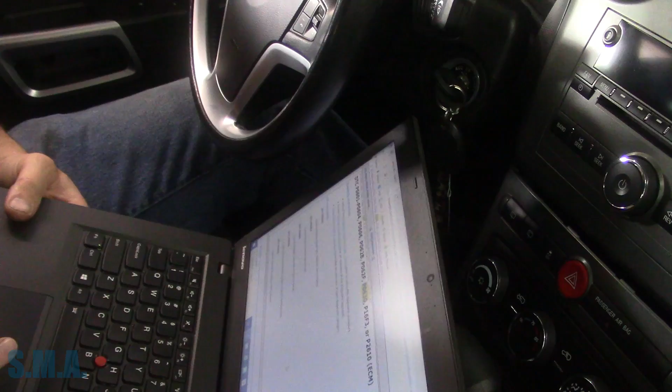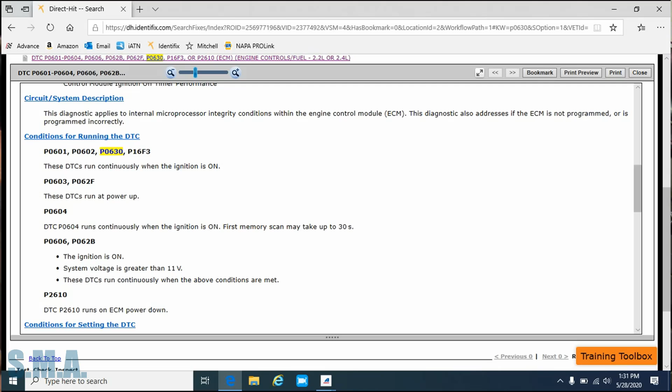Alright, so here we are, P0630, let's scroll down. VIN not programmed or mismatched. Circuit description applies to internal microprocessor integrity conditions within the engine control module. Diagnostics also addresses if the ECM is not programmed or is programmed incorrectly. Conditions for running, continuously with the ignition on, runs at power up.

Let's see. Actions taken when DTC set. The ECM detects internal failure, incomplete or incorrect programming.

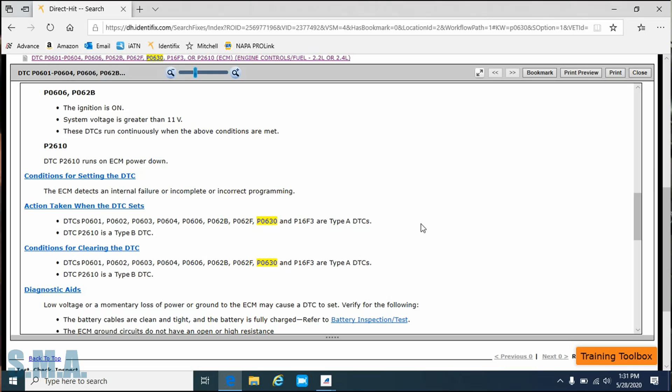Now I will be honest with you, I did try to program this ECM just to see, and it does not work. It fails. It just acts like the module's bricked. It immediately fails the programming. It won't even, it lets me in, and then that's it.

What's it see here? Low voltage or momentary loss of power or ground, ECM may set the code. Make sure the battery cables are clean and tight and fully charged. ECM ground circuits do not have an open or high resistance. ECM power circuits do not have open or high resistance.

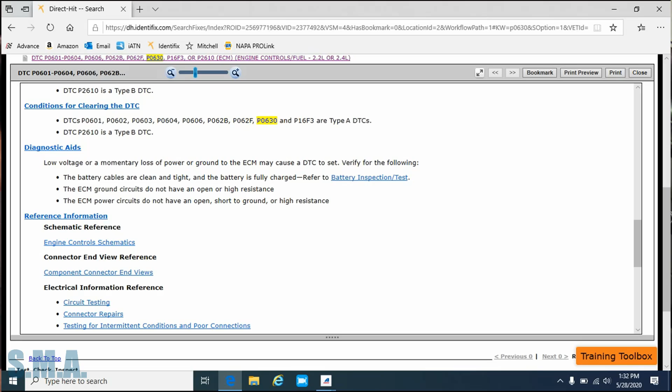So this wants us to check powers and grounds at the ECM, unlike the body module, which said forget about it. Then we come down here.

Ignition on, observe DTC information on scan tool, verify that these codes are not set, which are not. Observe scan tool, 630 should not set.

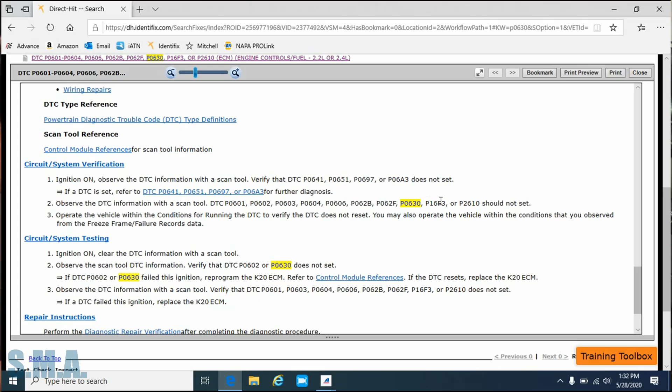Run it in the conditions. It does not set. If 630 failed this ignition, reprogram the ECM. If it resets, replace the ECM. So that's pretty cut and dry.

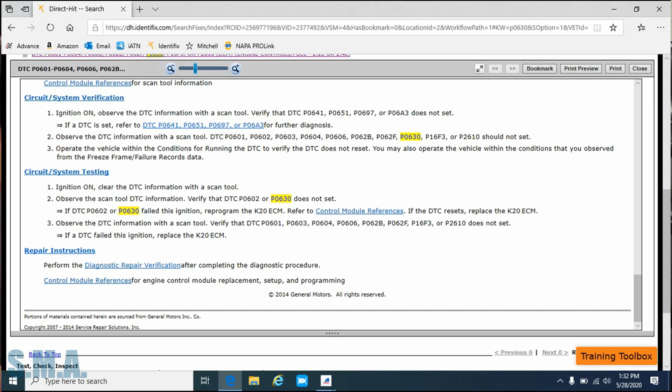I say we go and we get powers and grounds to the ECM. That'll be the easiest thing to do. And then we'll check them, which I assume are right. The car starts and runs and drives. But you never know, we'll just double check all of those. If the integrity of them is all well, we'll slap a box in it.

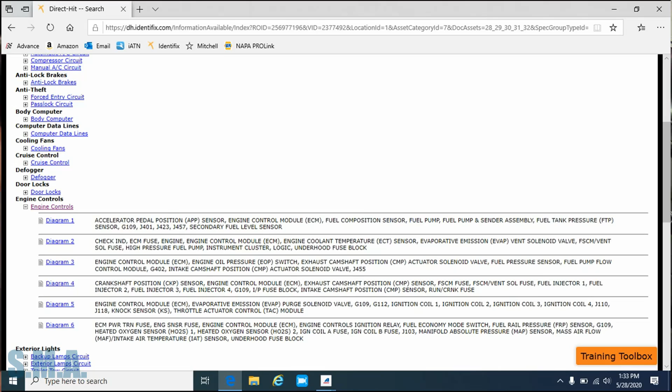We'll program that. And we'll move on with our life. Probably on the first and last diagram is what I'm going to assume here.

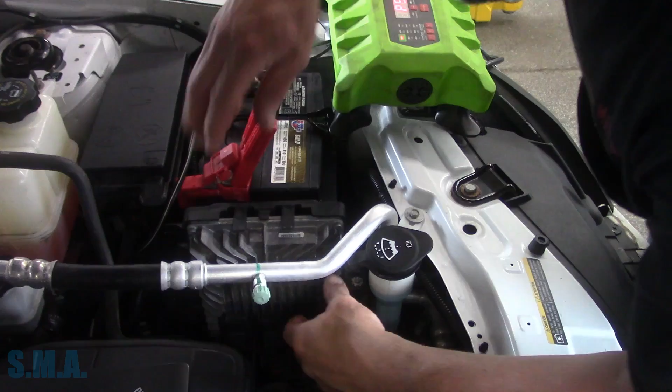So here we are. I think I found them on the diagrams. Not very many of them here. Let's see if we can't pop the ECM out of here. At least we don't need any tools.

There's our 3 connectors down there. The key is off. Taking the, see if we can't get these all unplugged. Identify who's who. There's X1, X2, and X3. Sounds like my high school days.

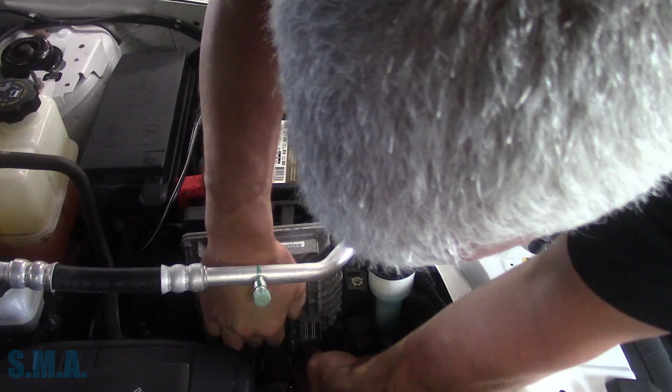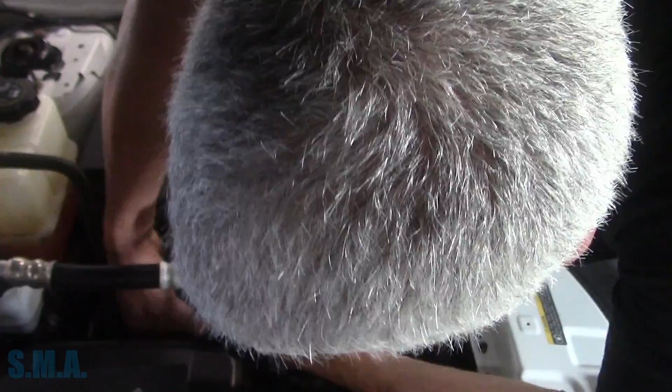Get that one unplugged. And of course, service data was no help identifying which one's which, because all the connectors are the same. So hopefully they're labeled down here. Usually they're different colors, we got gray and black. Sometimes service data will tell you which color is which. In this case it didn't.

Hey, speaking of exes, there's my ex-girlfriend, I married. What's up, Mrs. O? How's it going? Oh, good. Except...

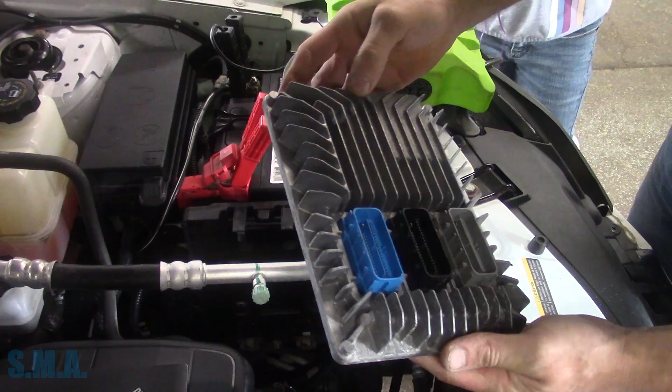We got J1, J3, so maybe this is 1, 2, 3, we'll call it. That's gonna be my guess.

Did a paper print out in the printer for me? I think so, will you go get it there, Sissy? What? Will you go get the paper out of the printer for me? Printer, paper. Yeah, take your earbuds out.

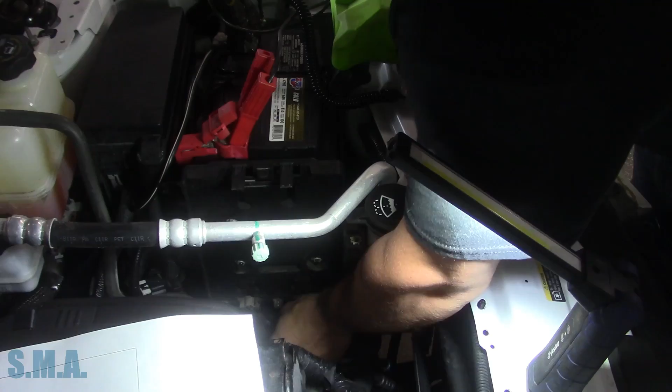Yeah, let's give it the old college try. We're gonna assume the blue one is X1. That's J1 on the ECM, so let's get Mr. Blue. There he is. And according to the factory diagram, pin number 51 and 52.

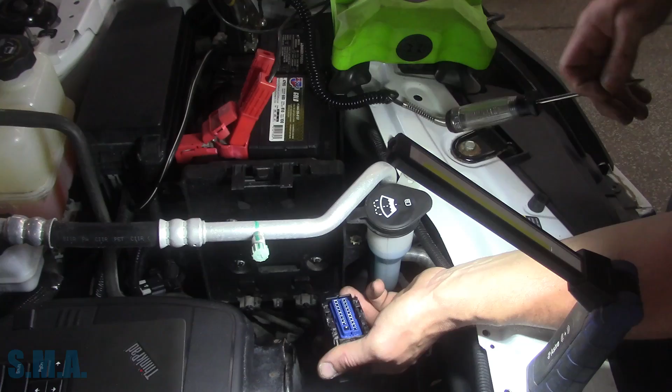So 52 should be that one right there. According to the picture, we got a test light hooked to battery negative. I'm just going to stick a T-pin in there very gingerly. We got a light there, and we got a light there. So we have both our powers, and it does appear that J1 and X1 are the same.

So blue connector is pin 1. Now let me look for the rest. So we have one more pin here for ignition power. There is 2 more ignition powers, but they're controlled by the ECM relay, which won't have power unless it's plugged in, because the ECM needs to turn the relay on.

But it looks like we have pin 70. So let's see, this is 72, 71, 70. So that one should have power. Yep, and that one has power.

I don't know if you guys can see it with the bright light here or not, but pin 70 lights up nice and bright, and then the other two. So we have our three powers that are there. And it looks like we should have two grounds.

One in connector X2 and one in connector X3. So we're going to move the vice grips over here, go to battery power, and clip them right on this stud. Test light's good. So it looks like connector X2, which is going to be the middle one, that's the black one. Pin 73, which is the big pin, the only big pin in there. That one has power, or good ground, lights up our test light.

And then connector X3, which is going to be gray, and that one is also pin 73. So that's the big terminal there. So there, we have our powers, we have our grounds.

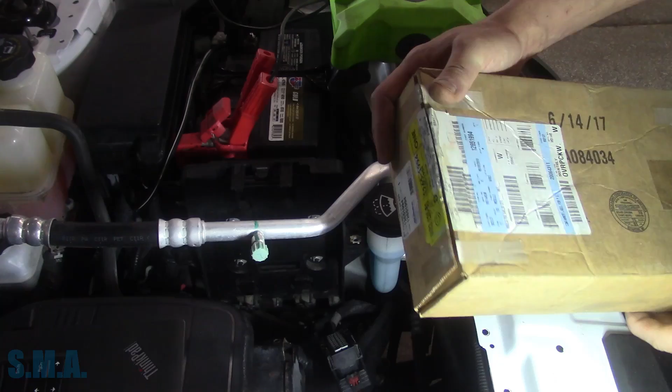We can now condemn the ECM and go get a new one. And here we go, just like that. We got a brand new one for Chevrolet. This thing looks like it has been kicking around a while. Tape's broke. How many times have the guy at the Chevrolet garage plugged this thing in? Hopefully not many. Made right here, America, Chevrolet, baby.

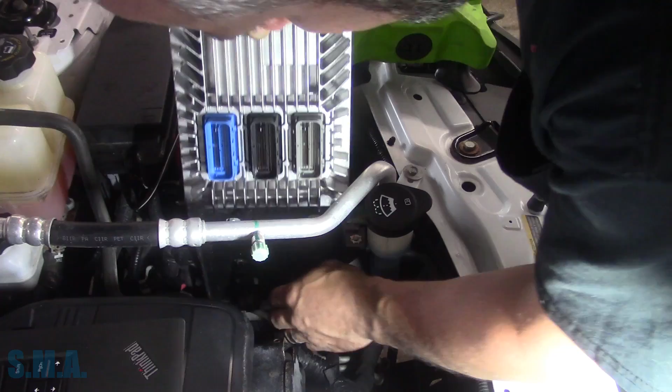So we'll get this down. Let me go shut the key off and I'll plug it in before I set it down. Let's start with the black. No, let's start with the blue, I mean. Furthest one away, that one's black, that one's blue.

And the 2 o'clock just showed up, so we're going to be interrupted here momentarily.

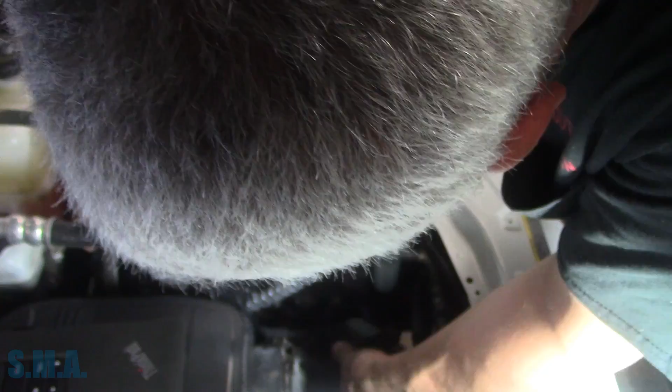Get that one kind of slid on there, down, clicked in. We'll find the blackie. Where'd you go, blackie? There he is. Come on. Get that one slid on. Down, clicked, locked.

Your 2 o'clock is here? I know, Mrs. O, we just said that. Weren't you watching? Oh, she just left.

Now we'll get this down. Click, click, boom. ECM's in.

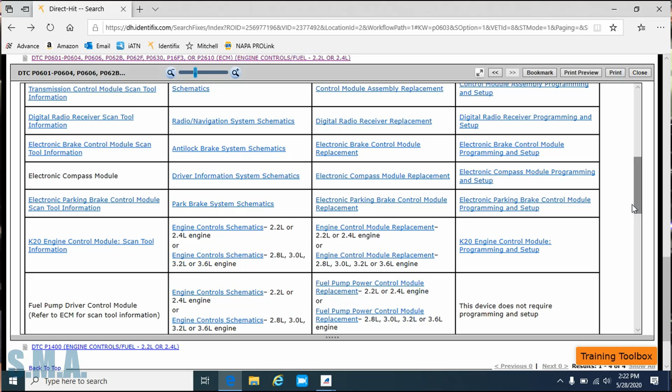Now we gotta program it. Alright, who's still with me at this point? Let's get some data up here on your screen. I know this is boring, I don't know who's still awake. Back when I was a kid, we'd fix cars with WD-40 and a screwdriver. Not anymore, now you gotta use a laptop and a screwdriver.

So we're gonna go to ECM module programming and setup. This is without LF1 or LFX. If the ECM is replaced, the following procedure must be performed: ECM reprogramming, theft deterrent. The ECM will learn the incoming fuel continue password immediately upon receipt of the password message. Once a password message is received and the password is learned, a learned procedure must be performed to change this password again. An ECM which has been previously installed in another vehicle will have learned the other vehicle's fuel continue password and will require a learned procedure after programming to learn the current vehicle's password. Then we have to do the brake pedal, throttle relearn, reset the engine oil life and transmission fluid life.

With a scan tool, instead of just setting them back to 100%, you can actually select the value. Let's see, setup for replacement. I don't see anything too out of line here. So we're going to go back in here, start SPS. We'll let this get re-rolling again here.

We'll turn our key on and we'll flick our headlights off. Roll up the window so nobody can talk to us. We got a flashing check engine light currently.

See if we can get this done before somebody else pulls in. And somebody else is already here. That did not work for me. Never works.

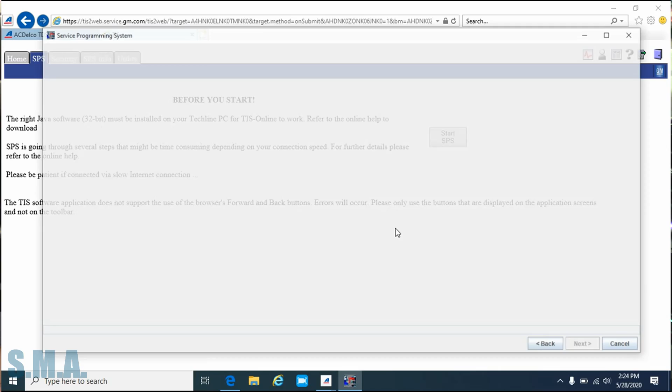So like I say, I tried to do this the other day and it didn't work out. Next. Next.

And we're 2012. Oh crap, you know what, I don't know if I've got the VIN still stored in my clipboard. Hopefully. If not, we're going to have to type it in manually. What was it? 3GNAL? I can't remember. Because it's not going to be able to pick the VIN out of the ECM, obviously, because it's new.

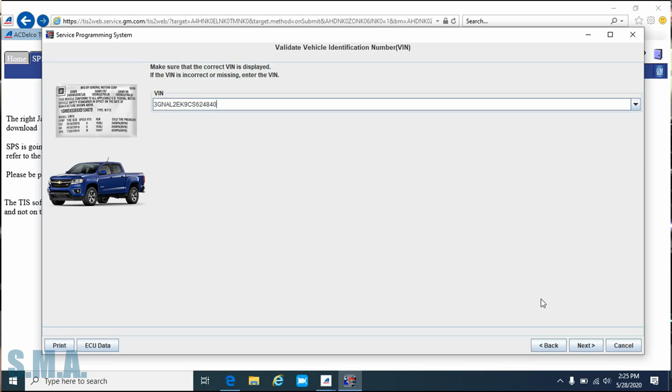Let's see if it's still on our clipboard. Kablam! Look at that. Remember, hit the backspace once. 3GNAL, yep, that's it. We'll hit next. We'll pick ECM. We'll hit next. Next.

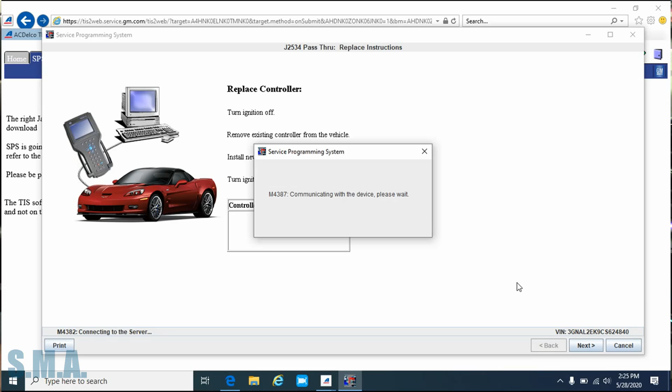Okay, let's go down through here, make sure nothing is selectable. Shouldn't be any options. Enhanced calibration, oil life monitor, yep, for the P0011. Calibration for oil life monitor, check. Nothing is selectable. We will hit next.

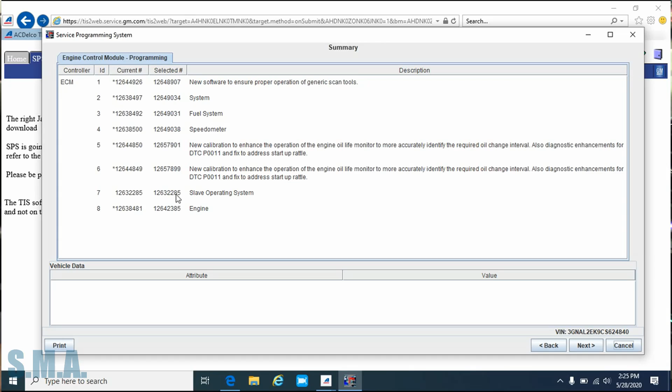We can see all our part numbers here are all different, except for the slave operating system. We will hit next. And this is where it failed immediately the other day. Beep, beep, beep. It'd come up, it'd lock up my scan, or lock up the computer and lock up the car. You had to sit here and wait for it to go through like 3 or 6 attempts before it finally turns all the other modules back on.

All right, looks like we're programming. Sometimes the ECMs take a little while longer.

As far as the theft deterrent, I don't know if we're going to have to do the 10-minute or not. I know on some used ECMs I do. Just put a new one in, I think it was a 12 or 13 Chevrolet, a couple days ago. That was brand new. The guy brought me a new ECM to put in it. Don't know what was wrong with it, just want me to put it in. And that one fired right up. Shut the key off. Waited a minute or so, back on. It relearned and boom.

And there we go. Let's turn the headlights back on. It took forever, like 12 minutes in real time, real life.

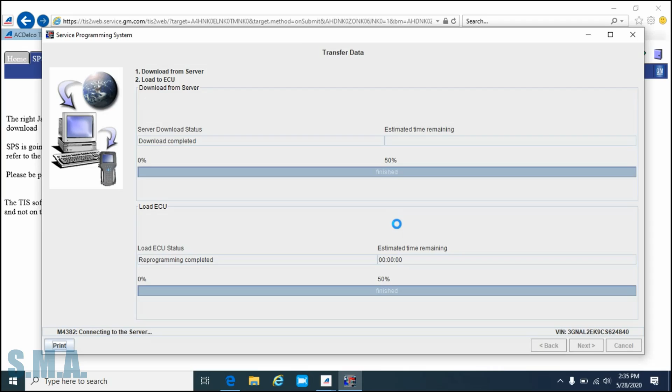Let's see, we do have special instructions. We are going to turn the ignition off. We're going to open and close our door. Whoo, it's getting hot up in here. We're going to proceed with the same VIN just in case we have to go to theft deterrent.

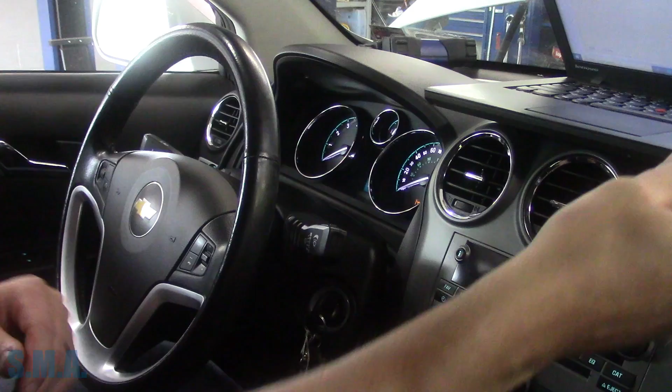We're going to give it a minute here. So we're going to give her a couple key cycles. Let me set this down so hopefully it relearns the theft.

See if we have any lights on. Oh, the lock light is off, so we should be able to start it. Hooray! It starts and runs. We have an oil change light and a service engine soon light.

So we're going to shut it off. We're going to have to fire up the old Tech 2 again. We'll just use that because that's in here. We should have an engine light on because the crank variation relearn is not done.

Isn't that one of the things we had to do? Crank relearn? I don't know. Brake pedal position, I don't know what codes it's going to have in it, but it should not have the 630, whatever it was we came to get. That's the only one we care about.

Alright, so we're going to unplug that. We're going to plug this little donger in here. I know this is probably the worst video in history, but this is what you got to do to fix cars, folks. I don't make it up. I mean, sometimes I just make it up as I go.

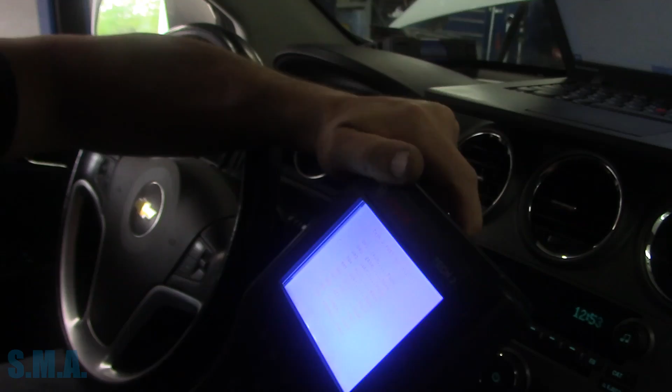I know this thing doesn't show up on the screen very well. That's because it's kind of old school. It's not really old school.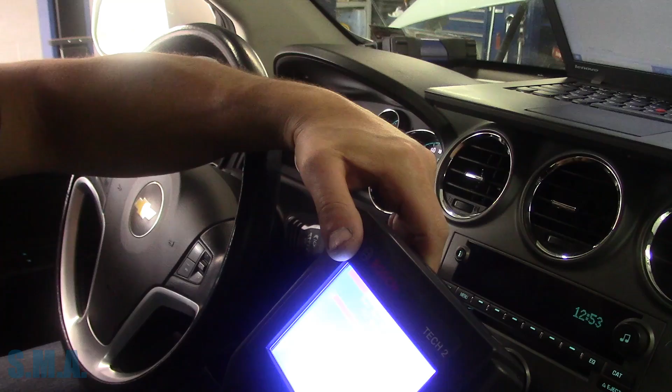So we're going to pick 2012 MPV Chevrolet truck. This is a VIN L Captiva Sport. We're going to go powertrain 2.4 6-speed automatic. It does not have all-wheel drive. We'll turn our key back on. We will pick engine control module, DTC display. Shut our headlights off and see what the survey says.

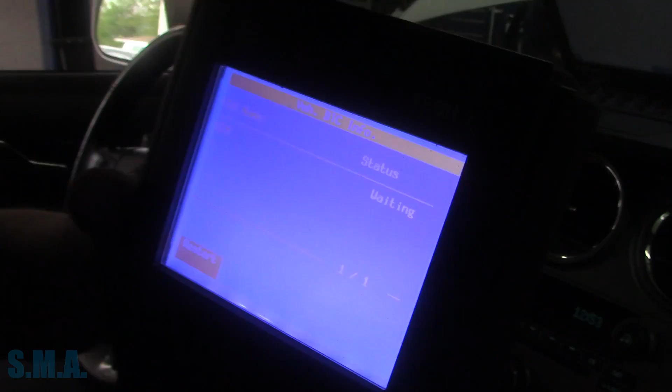Waiting is what it tells me. I'll wait for it to wait. Present. And 4 DTCs. View all.

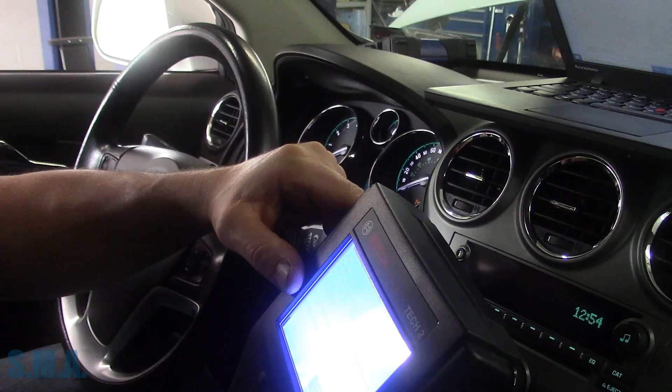P0700, crankshaft system variation not learned. Theft deterrent not programmed. VIN not programmed. Mismatched. Pass, pass, pass. Let's go like this.

We're going to clear out the ones that I've already cleared. We'll hit yes, and then we got to warm it up to do the crank relearn. It's got to be hot because we got to punch it full throttle.

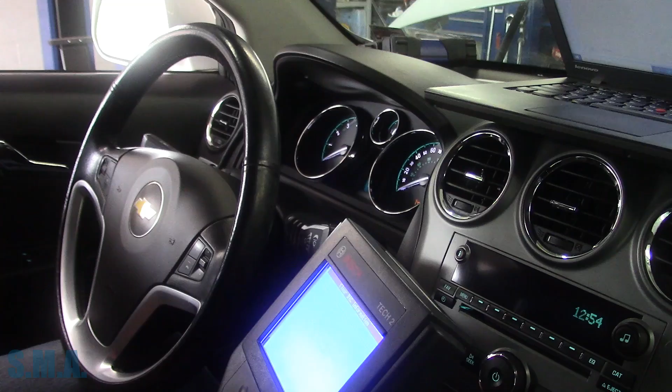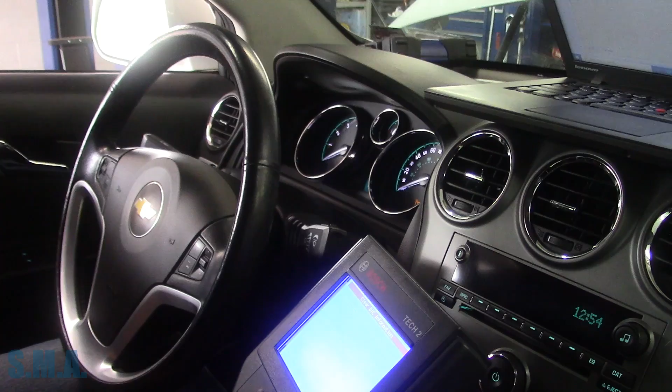Not uncommon to have a bunch of codes set. You can actually clear codes at the end of the programming if you feel inclined to do so, but I usually just do it with the scan tool because we have to plug it back in anyways.

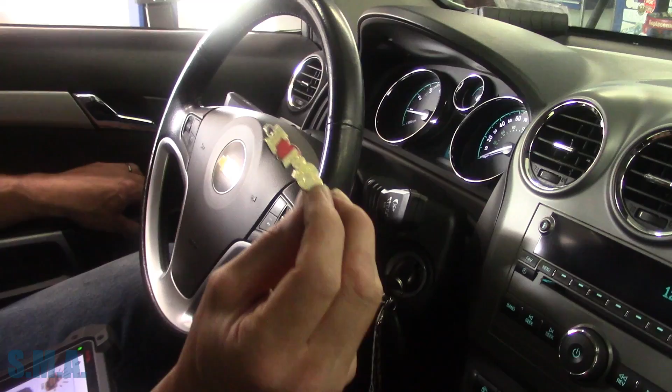Okay, so we're waiting for it to warm up. I've got everything all put back together, including the I love mom, or wow I, however you look at it - different perspectives. Everything's snapped back together.

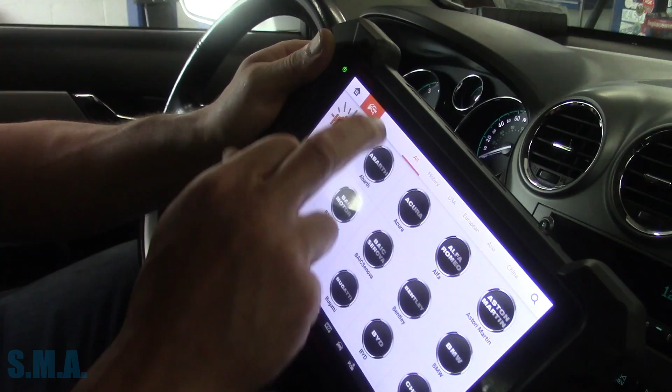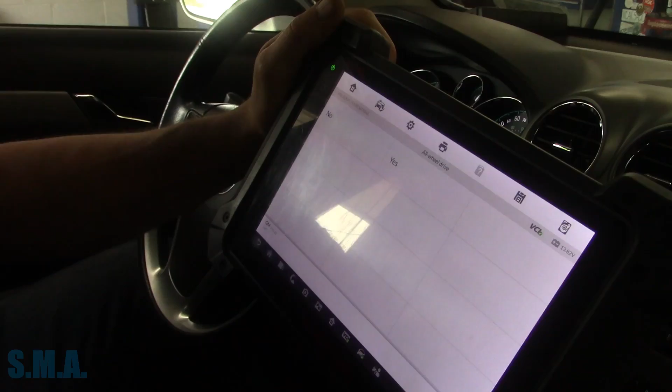I want to see if now it'll auto ID the vehicle. So I grabbed the Autel because the Tech 2 does not have this ability. We're going to look and see - it should be able to auto ID now because it should have a VIN number. Ta-da, there it is. So we did what we came to do. All-wheel drive, no. 2012 Chevrolet truck. How's that make you feel, Chevrolet guys? That's considered a truck. America, man's truck.

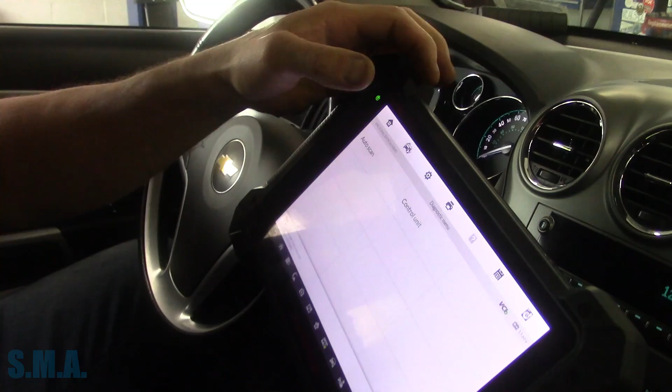Let's see, we're going to go diagnose, control unit, engine control module, and we want to see where we're at here.

We're still waiting for it to warm up. I don't know how warm it is because it doesn't have a temp gauge. I don't know if I can scroll through the menu, I don't even know how to scroll through the menu. Odometer, trip, odometer, nope. Let's see, current codes - crank variation not relearned.

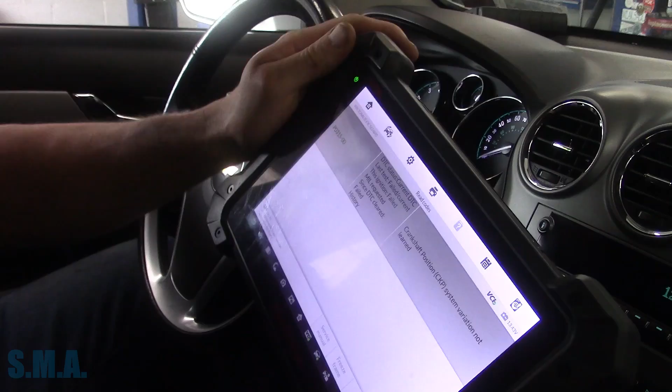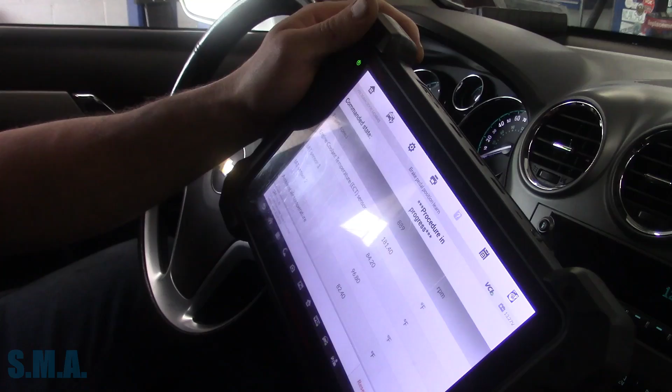So let's back out of here, let's go to special functions. Brake pedal position, we can relearn that real quick while we're waiting, because that's one thing we had to do. We're going to hit reset. Procedure in progress, it says reset. So that's good.

What do we got? Throttle position. Sounds like she's idling good. So let's go to crank variation relearn. We are going to have to turn off the AC.

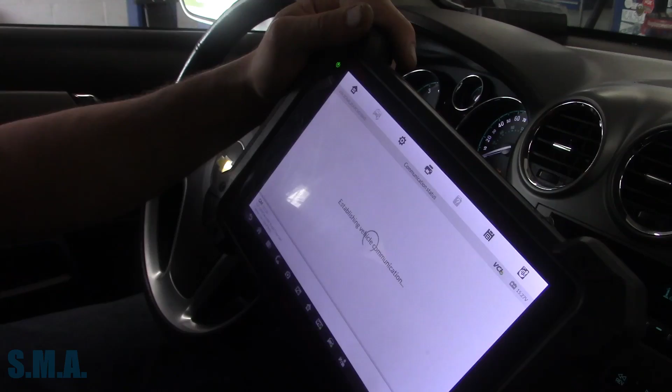Vehicle must remain in park or neutral. Make sure you hold the brake - this is where a lot of people fail on these. Hit OK, and then you're going to want to take it to full throttle if it's warm enough. So right now it wants us to give it full beans until fuel cutoff.

Learned and passed, okay? And our engine light is now out on its own. Let's turn this AC back on so we ain't sweating up in here.

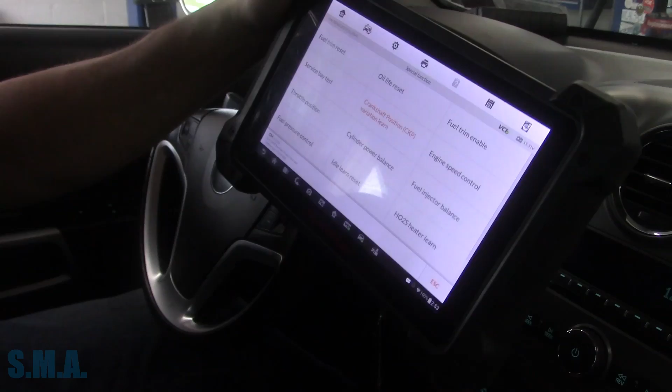So we should be able to go to trouble codes, read codes, and it should only be a history code at this point because the engine light went off on its own. We can turn the parking brake back off.

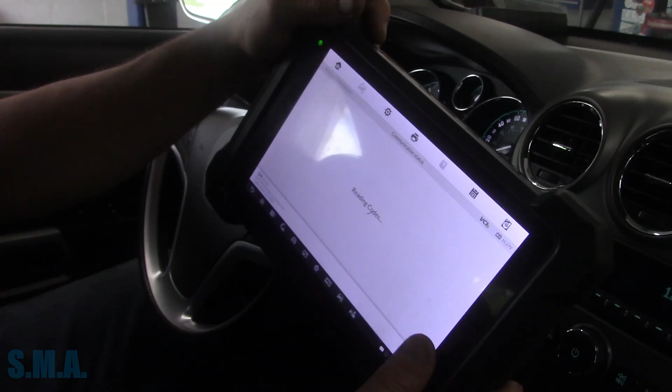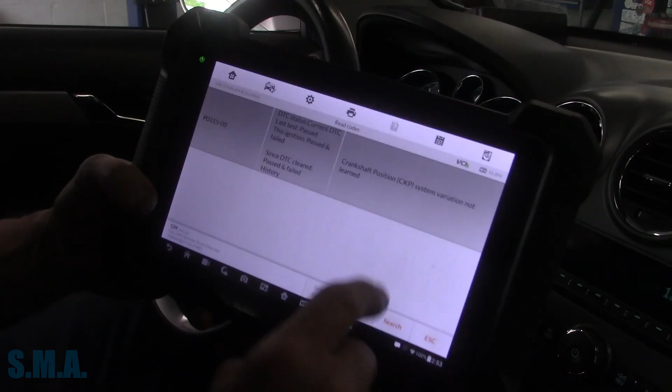Crack our window. Current history - and now we have passed, last test passed, and it is now a history code, so we should be able to back out. We should be able to erase that. Yes, we want to erase that.

It gets kind of wonky when you erase it with the engine running on this - it loses comm with the ABS module. Alright, fantastic. If it does that, you just shut the key off and wait a bit.

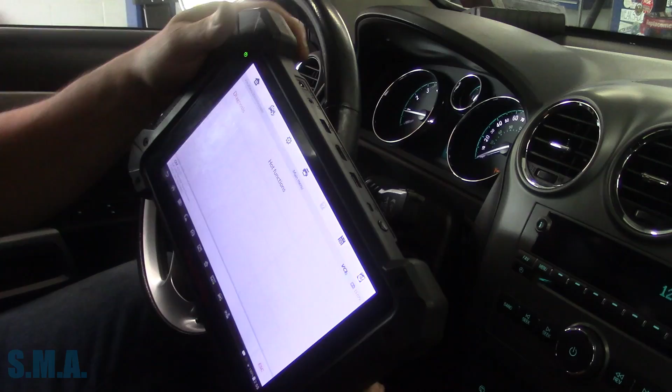Let's see, hot functions, we're going to go oil life reset. Auto oil life reset, what's that option? I don't know. Engine oil life, 0% it says. But our light's out - why does that say 0%? Huh, our oil life went out. I don't know what the auto was, it still stayed at 0. Yeah, it says it's at 100.

So you can change that value. Like I say, you hit input value, and let's say for example this car was at 40%, you reset it. But I believe it's here for an oil change also, if we were able to fix this problem he was stating. So we'll back out of there.

I don't think we have to do any electronic throttle relearn. I mean, we can run through it, but idle learn reset shouldn't make a difference because it sounds - shut the AC off, turn off any engine loads, we'll reset it. It's reset, we're idling at 900 RPMs.

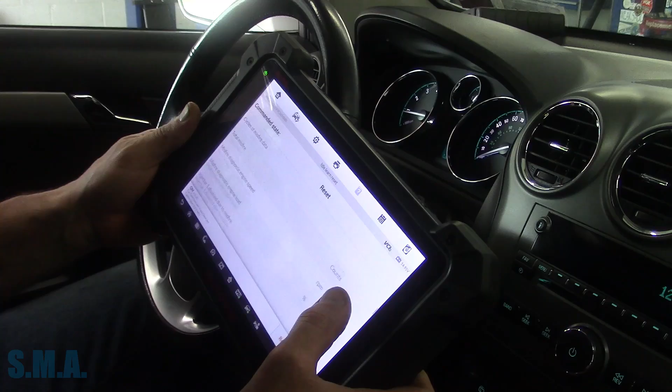Alright, I think that was everything that we came to do. Let's, whoops, I'm going to let it go through an auto scan. We'll see if we have a bunch of codes in other modules as results of stuff that we were doing. So we'll let it auto scan, we'll clear them out.

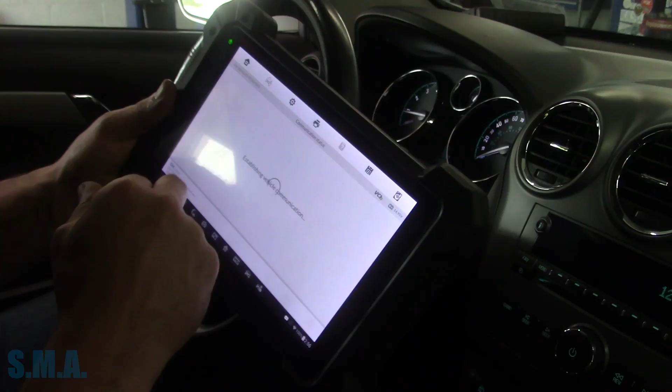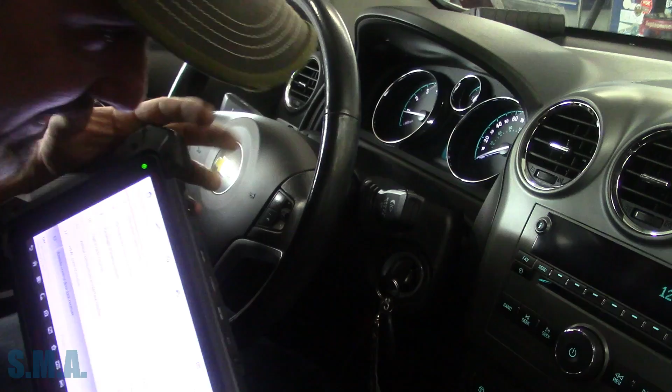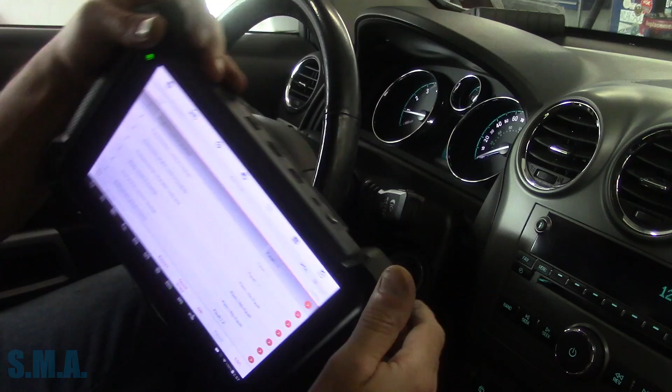If you remember correctly, it had no com codes and a bunch of history codes stored for the body module and other modules. So we'll get rid of all that garbage. Anytime you have the key on with a bunch of stuff unplugged - we had HVAC stuff unplugged, park and brake was unplugged, passenger airbag indicator was unplugged - it's going to have a host of codes, which it does. It's got piles of codes. Park and brake's got 5 codes. Let's go to the report.

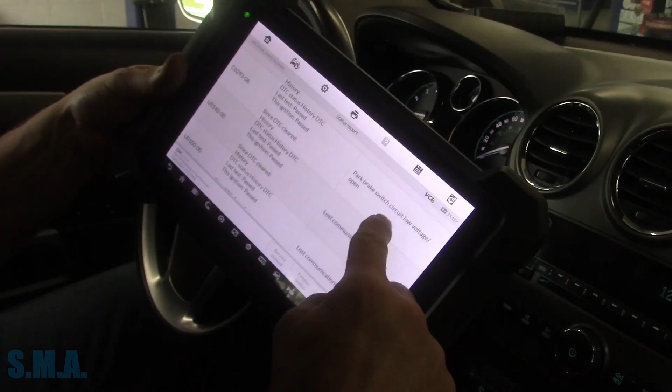A lot of these are going to be history codes now, not active. Let's see - lost com with ABS module, those are all passed now. That's in the engine module, because I tried to clear the codes with the engine running, and for whatever reason this car does it. Lost com with BCM, lost com restraints control module - these are all history codes. History, park and brake switch. Lost com with BCM, lost com with ECM. Not uncommon, nothing to worry about.

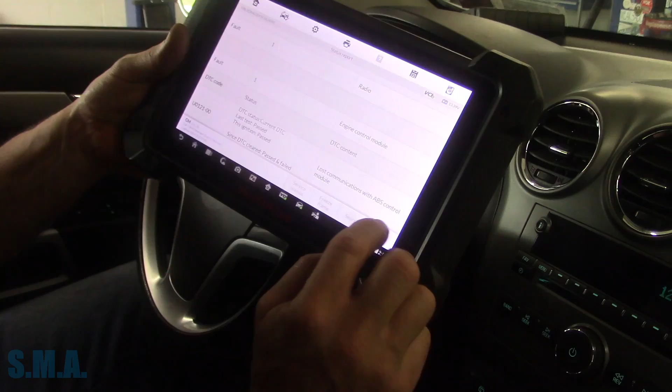All history codes. So we're going to go key on, engine off, then back out, and we'll do a quick erase, and everybody should be happy at that point, including you.

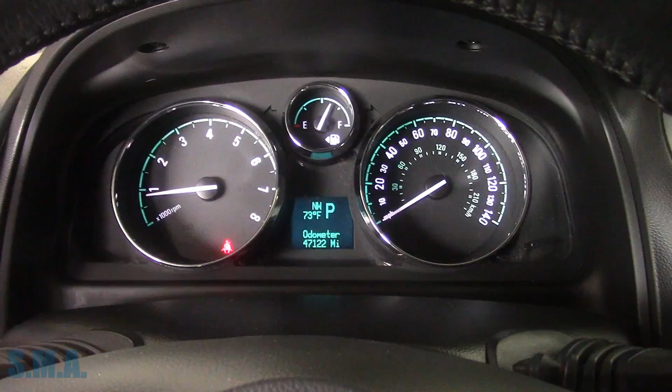And there we have it, folks. I assume this one is finished at this point - got a few other things he wanted done to it - but all the lights are off, so now the car can be driven, or at least registered. No more engine lights, body functions are functioning, windows go up and down, AC works, everything's down here, park and brake, all that business.

So I guess we're done, we'll leave it at that, fellas. Can't take you for a toot around town because the car has no plates on it.

However, be warned, when you hook up the jumper cables on your car, make sure red to positive, black to negative, or however you have them. Make sure it's the same on the jumper car versus the car you're hooking it to, or your little jump pack, which most of them are smart - you can't hook them up backwards, I suppose, unless maybe the battery's completely dead. I don't know, I haven't tried it.

I did see, when I was looking at the B1000 code, it gives you your silver bullet fixes - which parts to change first. There were some people indicating the car came in with the battery hooked up incorrectly. There's a black wire with a white stripe that hooks to battery negative, and some guys reported that somebody changed the battery - Advance Auto and some other places - and actually hooked that to battery positive, and it was smoking the body control module. So that's plausible, it may have been the case here. When the car showed up, everything was hooked up correctly and it started running. Just a big fat assumption.

I know these videos aren't the best because they don't have any wrenches - I mean we use what, a 10mm, a screwdriver, and a $1,000 bill. By the time you buy these 2 modules, program them, install them, it's an expensive repair, and unfortunately it has to be done with a lot of expensive tools. But like I say, I didn't build it, I didn't buy it, and I didn't break it - it's just how it is.